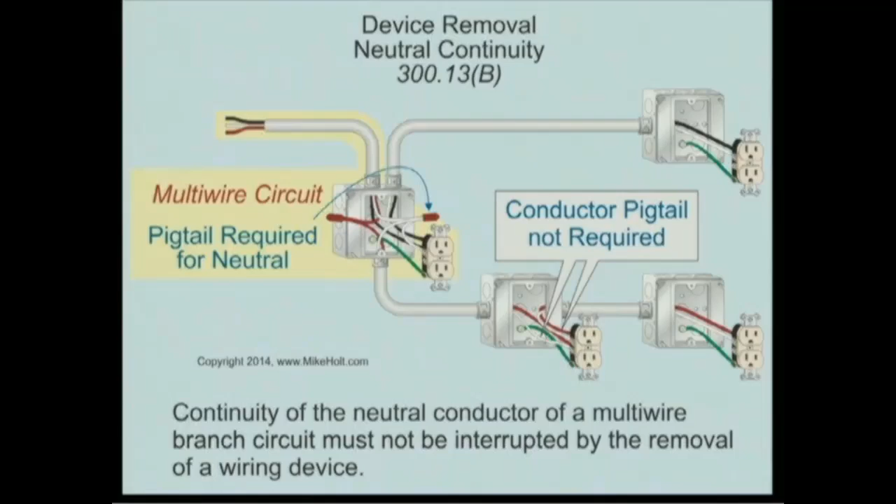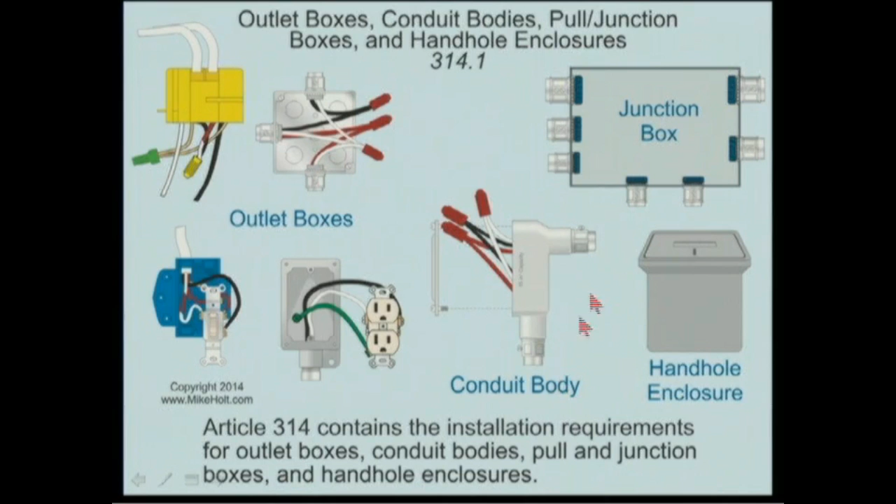314, outlet, pull boxes, junction boxes, handhole enclosures. There's a lot of work in 314. Wow. Now, 314 deals with outlet boxes, a light fixture, just making a splice box here, and switches, receptacles, conduit bodies, junction boxes, and handhole enclosures. So it's a pretty broad article.

Non-metallic boxes. You only use a non-metallic box with non-metallic raceways and cables. But there's an exception. If you want to use a non-metallic box with a metal raceway, then metal raceways can terminate to a non-metallic box where internal bonding means are provided between all entries. So if I want to put bonding bushings and bonding jumpers, then you can. So non-metallic box, okay, but if you use metal raceways, you're going to have to be bonding all those together.

314.16, number of conductors in boxes and conduit bodies. There's a lot of work here, but we're going to do this. Boxes containing 6-gauge and smaller conductors must be sized to provide sufficient space for all conductors and devices in the boxes. So you need to make sure with smaller circuit conductors that you have enough room in the box.

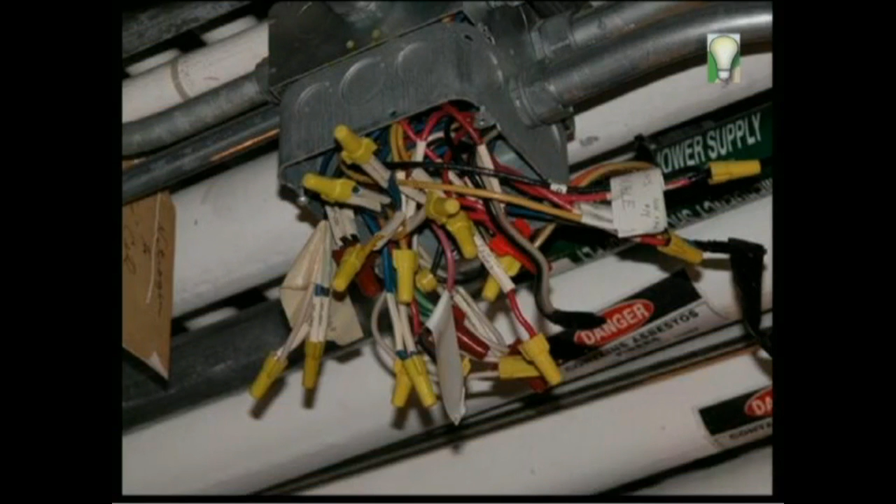That's kind of questionable. Just one more extension cord. By the way, there is no limit to the number of extension boxes that you can put on a circuit. So you put as many as you want to in there.

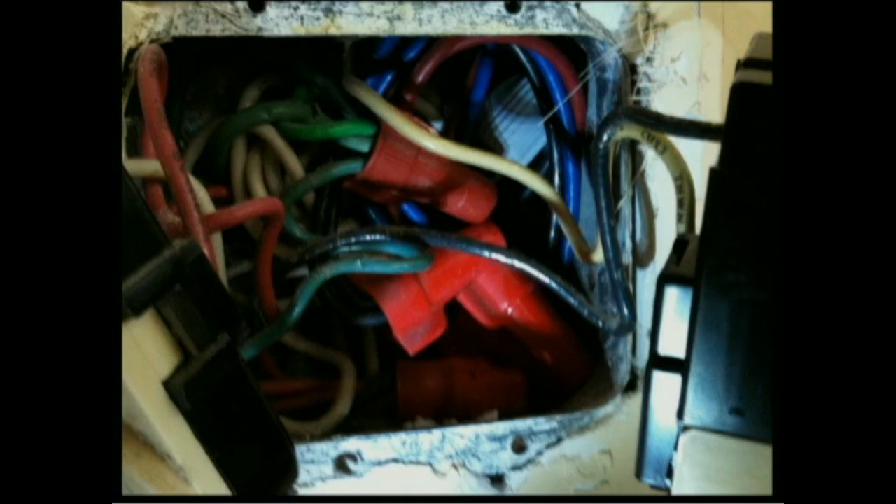Here's an example. There's a switch, there's a dimmer here, and a GFCI receptacle. That is just, wow, that's a problem. You can actually see, I don't know if you can see it there or not. You see where it's pressed in here? You can see where the wires have been pressed in there, trying to push that down to get it inside here.

Anytime you see a blue wire out of a box, take a look at this, that's never a good sign. I'm just saying. When you see a blue wire nut in a box, I got a feeling all those neutrals are twisted together. The grays are okay.

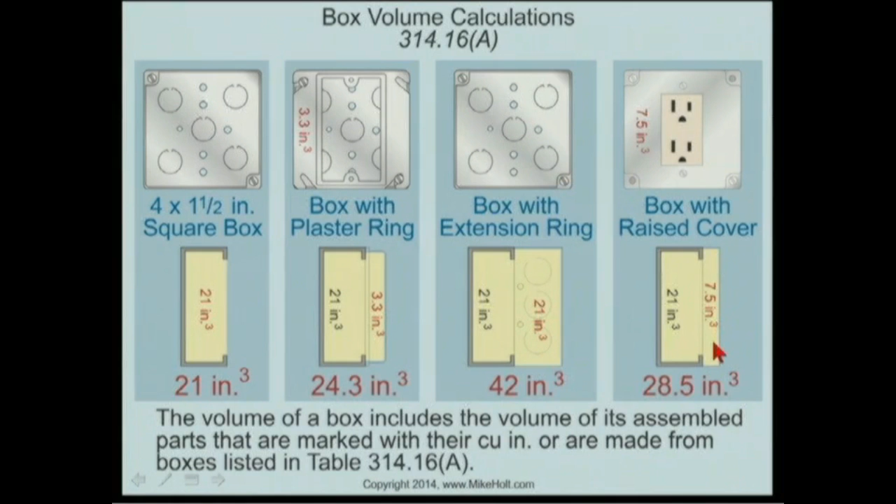Okay, so now let's do some box calculations. The first thing is, what's the volume of the box? So you get the volume of the box, and then you add the volume of any extensions you're adding. Here's a plaster ring, or here's an extension ring, or here is a box that has a cover on it that has some volume. So it's a matter of what's the internal volume. That's the first thing you go to. So you get the box volume.

And Ryan, what's the volume of a 4-square box? Is there a table 314.16(B)? Yeah. Is it A? It's 21 inches. 314.16(A) says that a 4-square by 1.5 deep box is 21 cubic inches. And then you're going to add an extension box to it, which is going to be 4-square by 1.5, so that'll be another 21, so that's going to be 42, plus a 7.5, so that's 49.5. That's the volume that we're working from in this application.

Small fittings like cable connectors and raceway fittings, lock nuts and bushings are not counted. See, what we're going to do is this. For us to determine whether this is going to be safe or not, we need to know how much volume you have. And then we start adding up the stuff that you want to put in it. It's kind of like I've got so many balls that I'm trying to put into a container. Well, how big is the container? If I know what the volume is, then I can start filling it in and I can calculate, rather than putting it all in and realizing, oops, it didn't fit.

So instead of you running all the wires and then trying to make a splice and it didn't work, best thing is know in advance, what's my volume? What am I going to put in there? Then what are the volumes? Add them all up to see if it's going to work. Let's just do this in advance. So we're going to calculate it.

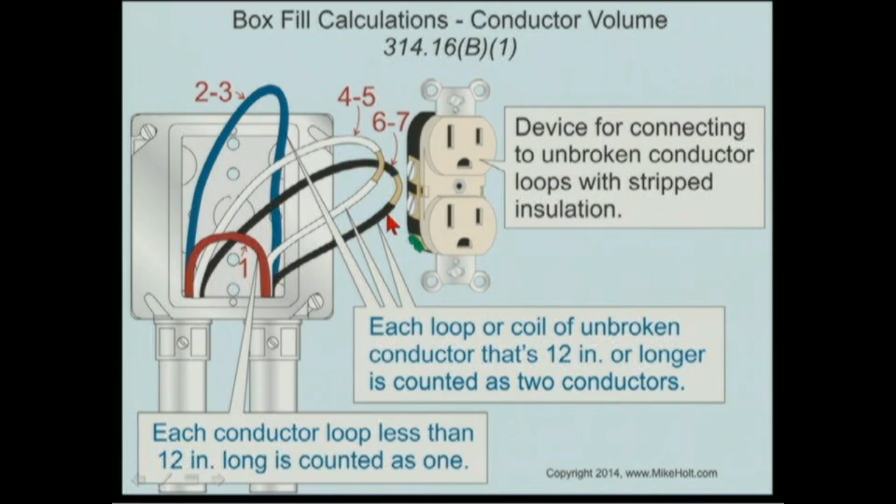If you have a dome canopy, then the fixture wires are not counted. That's part of that fan. So we don't worry about that. But it doesn't really matter. You got a dome canopy, you have so much volume up there, it really becomes not an issue at all.

If you could go back 2 slides, Mike. Let's say I decided to pigtail off of that white conductor because I'm going to a receptacle. That doesn't count either. Oh, wait, do I not have a graphic for that? No, I was looking for that. So it's in the textbook.

Right. And what it says is conductors that enter the box and terminate in the box count as a single conductor. Conductors that run through the box that do not provide 12 inches count as a single conductor. Conductors that originate in the box and terminate in the box do not count. Right. So therefore, what I should do is maybe have Mike put a pigtail on here, right? And then that pigtail does not count as a conductor because it originates in the box and it terminates in the box. Thank you for that.

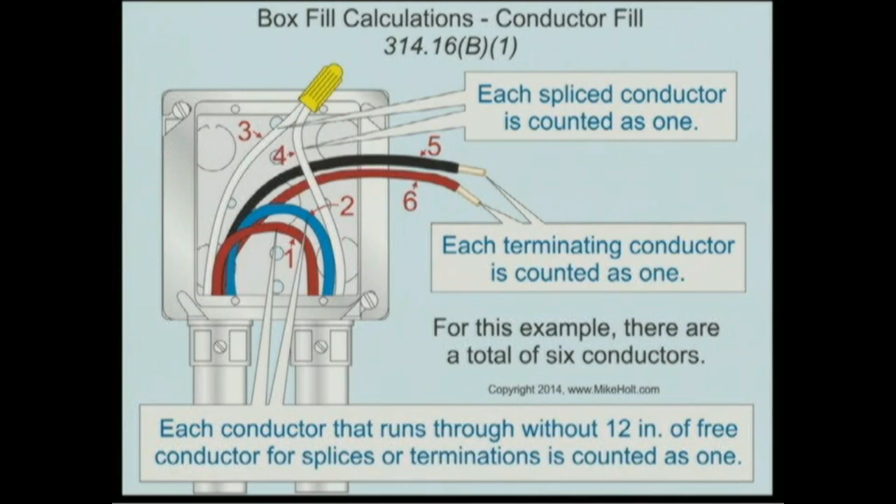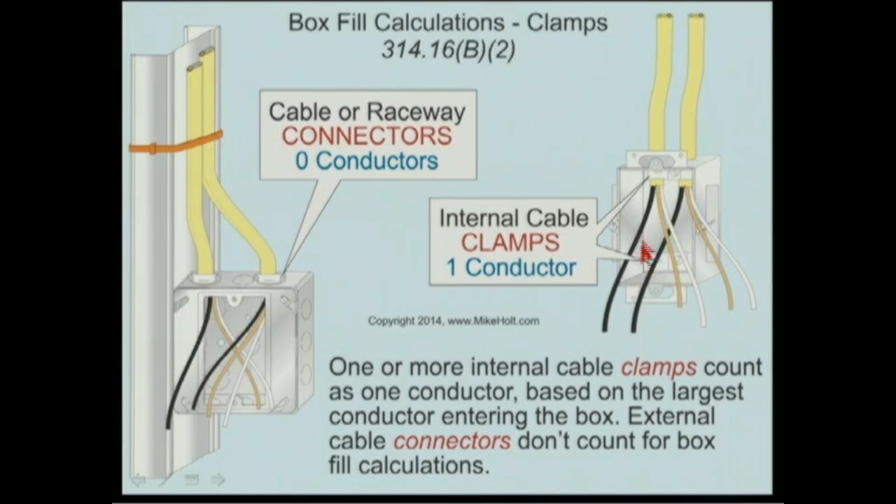Let's go now to counting volumes as it has to do with clamps. If you have connectors holding cables, it doesn't count for anything as far as the volume. Yeah, I know what's inside the box, but don't worry about it. Same thing at a raceway. Don't worry about that. But if a box has internal clamps, then the internal clamps are considered to be equivalent to a conductor. So what we're trying to do now is we're adding up conductors, and we're making things to be considered an equivalent to a conductor.

So you count the conductors entering the box and terminating as 1. Conductors running through the box that don't have 12 inches, they count as 1. If it has a 12-inch loop in there, it counts as 2 each. The clamps count as 1 conductor volume. And then we'll figure out later on what we're going to do with that.

Fixture studs. I don't think we see that very often anymore. That's an old type of system where you'd have like a 1/2-inch knockout and you have this device, and then you have this horseshoe thing, okay? That's called a hickey. That's old stuff that's done in the 40s and the 50s and sometimes the 60s and 70s. But if you have a stud or a hickey, the stud counts as a conductor, the hickey counts as a conductor. So this really is not relevant to us working in the field because you don't have studs and hickeys.

But if you're taking an exam and they said, hey, listen, we have a box. It has a fixture stud. It has a hickey. And you're like, what the heck's a hickey? At one time in the 70s, a hickey was a function of conduit bending. It's a rigid conduit bender, and it was called a hickey. So people got confused with that term there. But back in the 40s, they knew what the fixture hickey was. So go back over here. It's a horseshoe thing that goes from a 1/2-inch threaded entry down to a 3/8-inch stud. That's your hickey. That's your stud.

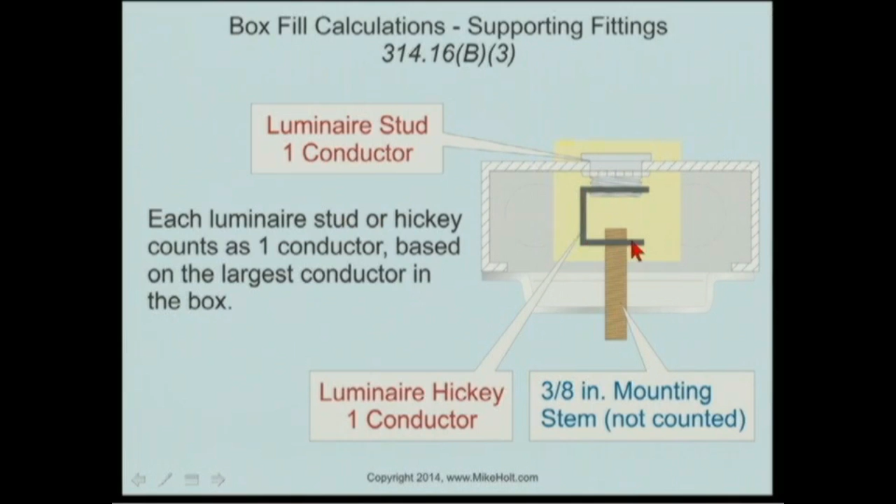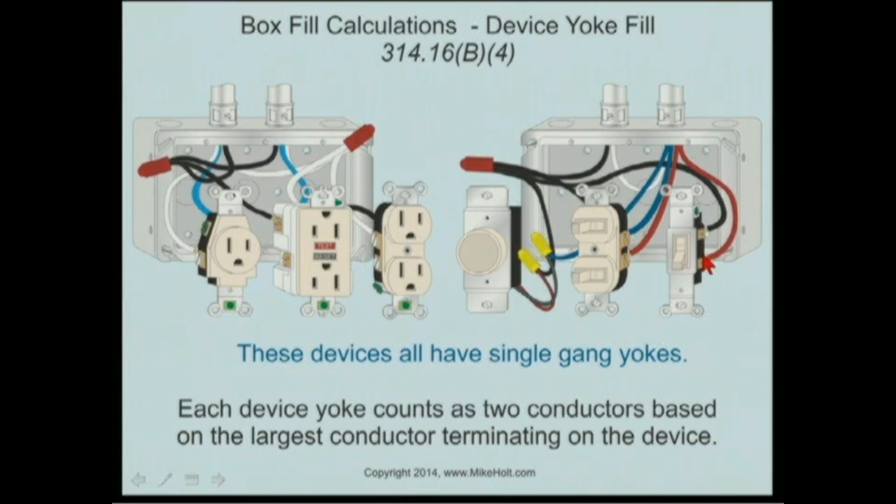This yoke is 2, this yoke is 2, this yoke is 2. This yoke is 2, 2, 2. And it doesn't matter if it's going to be a GFCI receptacle, a single receptacle, a dimmer, or a single switch. It's still 2 conductors per yoke. A yoke that doesn't fit in a 1-gang box, but you need a 2-gang box, counts as 4 conductors? Well, because it has that kind of volume in there. So that's 4 conductors.

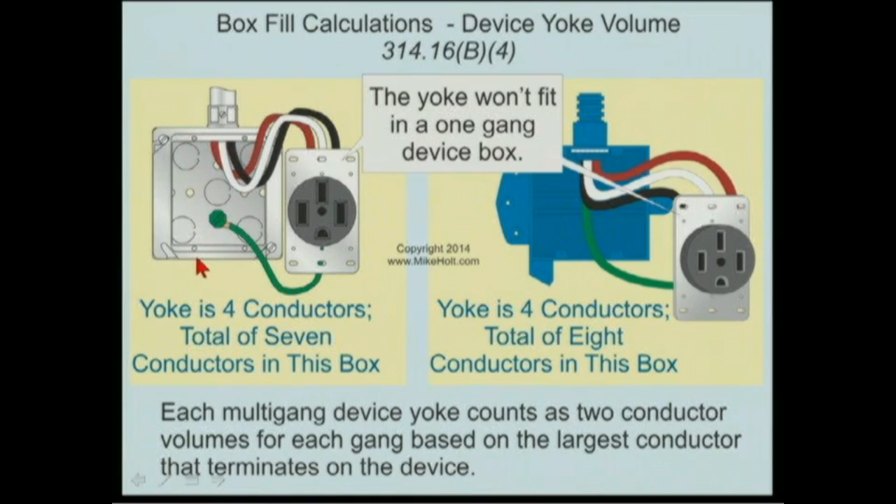Equipment grounding conductors. No matter how many equipment grounding conductors in a box, it counts as 1. Why is that? I don't know. It just counts as 1. But if you add an isolated equipment grounding conductor to the circuit as well, the isolated equipment grounding conductor also counts as 1. So I'm going to count this here. I have 1, 2, 3, 4, 5. I count 7 conductors with this example here on the left. Great. 1, 2, 3, 4, 5, 6, 7 conductors is what I count in that box.

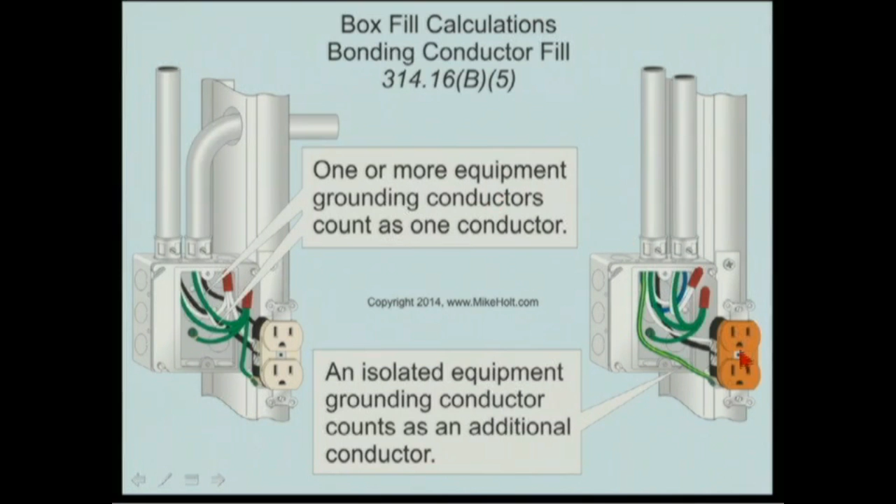Yep. Over here I got 1, 2, 3, 4, 5, 6, 7. I count 9. Here we go. Ready for this? The isolated ground is 1. The neutral in the receptacle is 2. The equipment grounding conductor is 3. The neutral that's feeding through is 4. The hot wire going to the receptacle is 5. The blue wire running through is 6. This neutral right here is 7. And 8, 9 is the device. I think so. So that's how you would do the counting in there.

Here's an example. Let's count this one. I have 1, 2, 3, 4, 5, 6, 7, 8. Is that what we have here? Oh, I'm sorry. This is 12 gauge wires. This is existing 12 gauge wire. There's 10 of these. 8, 9, 10. Existing conductor and device volume is 10 12 gauge wires. Right. How many 14 gauge wires can you add to this box?

Well, if I have 10 12 gauge wires, you see, we didn't talk about this, but Table 314.16(B) gives us the volume for conductors. And I probably should add a little graphic on here, which would be the volume of 12 gauge wire is 2.25. I don't even show it here. 2.25. Yeah, I don't show it on here. It's 2.25. 14 gauge wire is 2.

Make sure you take a moment, stop the tape, go in your code book there, and take a look at 314.16(B), which gives you the volume of conductors. Because once we count all these conductors up, we've got to now get the volume and see how that works out with the volume that we had started with as it relates to the box itself. So take a look at that inside the book in the calculation.

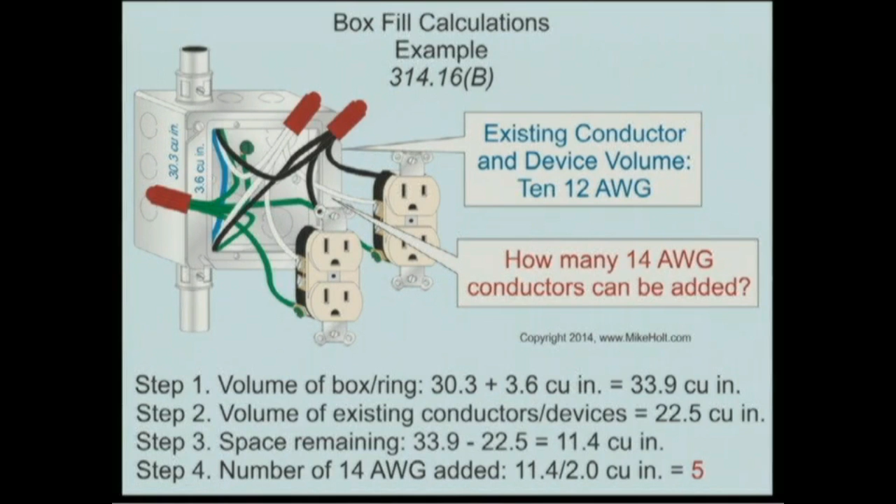Ryan? You know, and I would challenge you if you're an inspector or a contractor to really learn box fill. It's remarkably simple. Once you've done enough of them, it is so easy. It's insane. But one of the things that I thought was kind of cool over the course of my career with Draper City, when I first started there back in 2002, I wrote up box fill every single house, at least one, if not 10. I wrote up box fill constantly. And in 2013, I maybe wrote it up once. And it felt kind of good.

But it wasn't just me. It was the electricians. They stepped their game up. They started thinking about it, and they realized this wasn't hard. You don't just say, "Oh, I need a deep box." Well, what does that mean? Because they asked me when I'd write it up, well, do I need a deep box? Well, deeper than this. I don't know what a deep box is, but what you need is 26 inches. So do the math, and don't look at the back of the box where it says how many wires. Just do the math. Oh, do they have boxes? Well, yeah.

What it says though is that the industry is dumbing it down, and people aren't being responsible. Number 12, okay, well then people stop counting the device and they stop counting properly. You know what I mean? So just do it. Count the hots, count the neutrals. All your equipment grounds is 1, device is 2. Do the math. It's so easy, and it's worth doing.

And if any manufacturers are listening, please put the cubic inches on the outside of the packaging. Because when I go into the big box store and get a weatherproof box, the cubic inches are on the inside in the wrapping, and I have to unwrap it. No way, are you kidding me? It's crazy. So if any manufacturers are listening, my goodness, please put the cubic inches on the outside of the box.

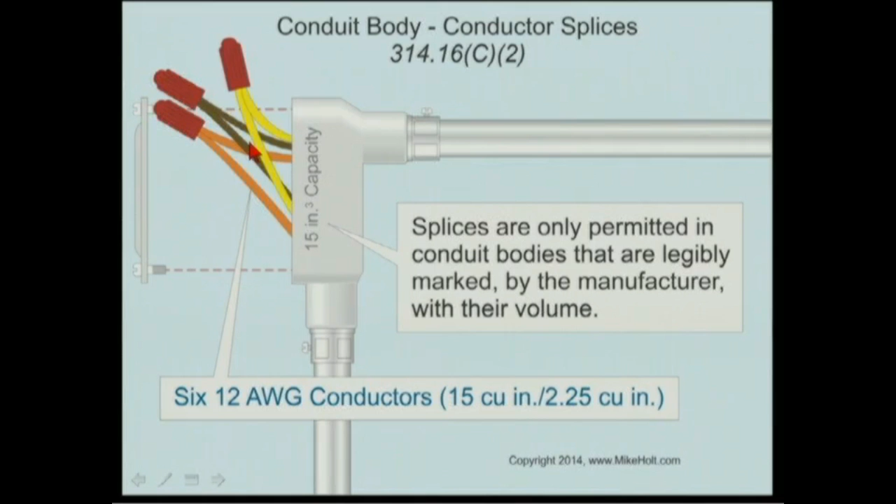So a 12-gauge wire has a 2.25 cubic inch volume. If this is marked 15 cubic inches, well, 15 divided by 2.25 gives you at least 6 conductors of 12 gauge. 1, 2, 3, 1, 2, 3, 4, 5, 6. That would be fine to put the splice in there.

So make sure you practice those exercises that we have in the textbook there. We just kind of do some glossing over here.

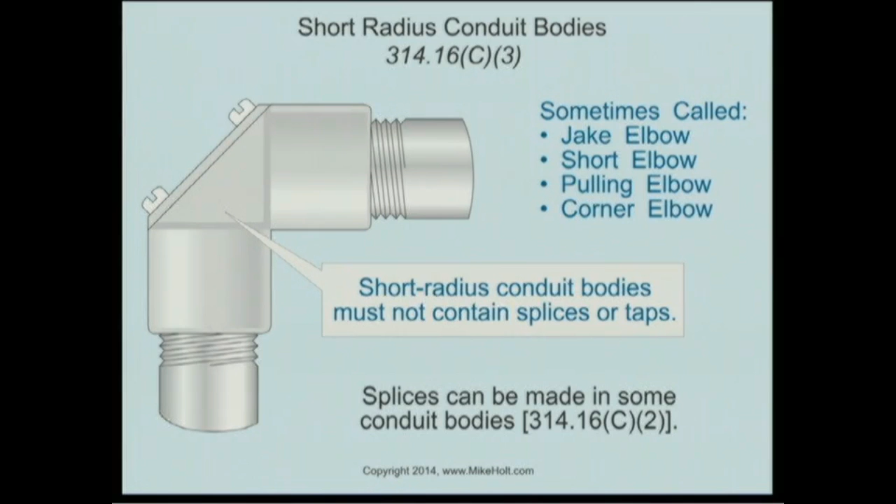Short L's or Jake L's or street L's. There's no cubic inch marked on that, and no, you can't make a splice inside those areas.

314.17, conductors that enter boxes or conduit bodies. Unused openings and cable openings in boxes. We talked about that in cabinets in 312. Now this has to do with boxes. You've got to close them all up. Plug them in there, thread it in there.

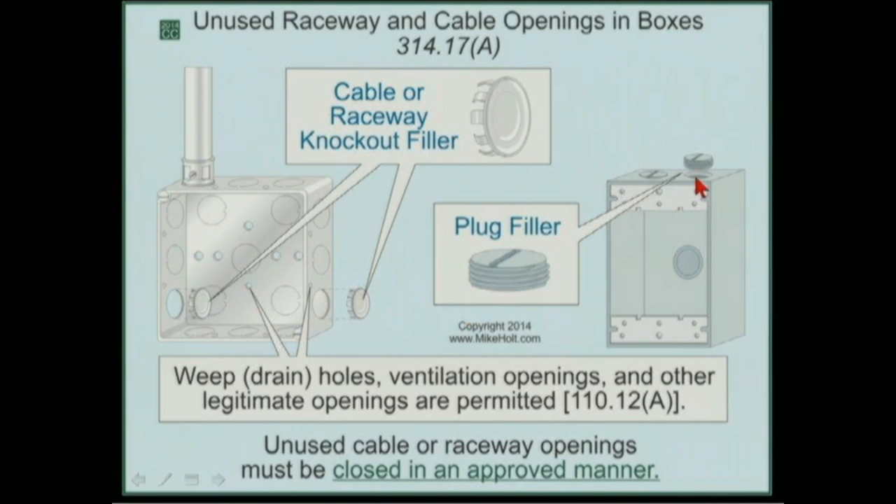This actually is a house. See, mud daubers. I'm waiting for the mud daubers to fill that in there for me. And they're working on it, well, I'm going to get to it. But that's just temporary. I'm going to get to that baby.

Non-metallic boxes. Raceways and cables must be securely fastened to non-metallic boxes or conduit bodies by fittings designed for the wiring method. We talked about cabinets - you got to secure raceways and cables to cabinets, but you had to have a rule in boxes that require you to secure it to the box, which is kind of like a no-brainer.

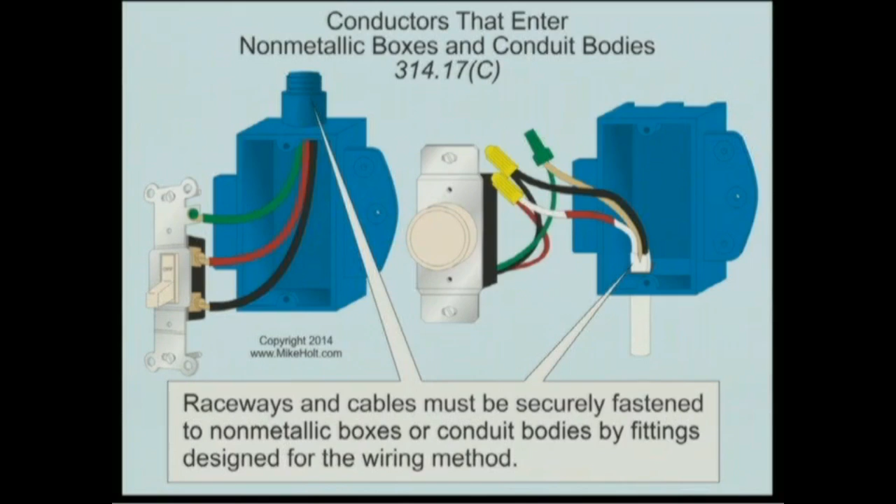And now, if you go into a one-gang box, you can bring the cable, and let's read it. Non-metallic cable terminating to a single-gang box isn't required to be secured to the box if the cable is securely fastened within 8 inches of the box.

You guys probably don't even know what this rule is about. What this rule is: today if you buy a plastic box, does it have like a little finger on there? You put it in there and it kind of secures it. Some of them do, usually they have some kind. Oh, do you have some that don't? Oh yeah, it's just a hole. Oh, when that's the case, then it's just a hole.

You just drop it in there. You don't need a connector, you just drop it in a hole. But if you're not securing the cable to the box, well, then this rule applies. With the exception, then you have to secure - you have to bring it within a 1/4 inch to the box, and then you have to secure the cable within 8 inches. Yeah, this is reality.

I did not realize that's that they all - I made see, boxes today, that's all I see. Okay, really? Yeah, no little finger thing that you - no, slide in and locks? I know what you're talking about, that kind of springs back. I think Slater or something like that? This is what I see. Wow, okay.

Recess boxes in walls or ceilings. Well, if it's similar to cabinets, if it's non-combustible, you can recess it a 1/4 inch.

Boxes, plaster rings, extension rings, or listed extenders must have the front edge set back no more than a 1/4 inch from the non-combustible finish. So if you end up having that box, they change the thickness of the wall, right? Now your box is an inch further behind the finished surface. Just put an extension ring, and then or change the plaster ring, whatever the case may be.

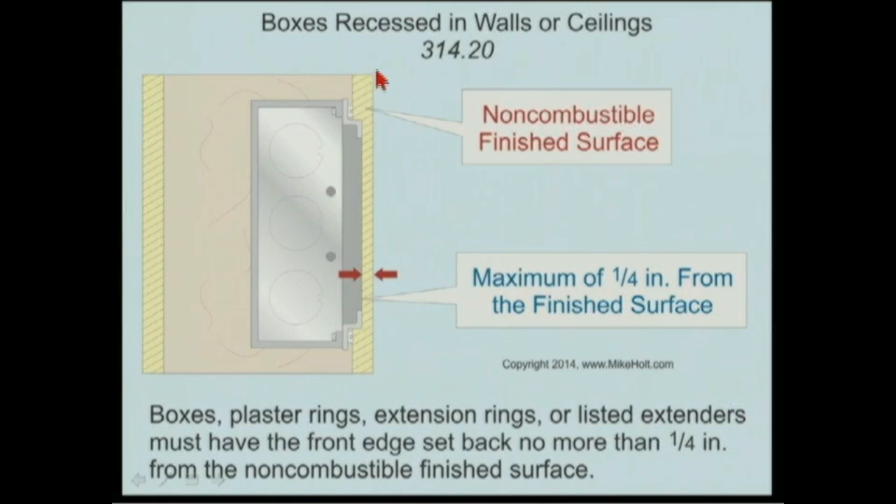So right there, gypsum—what we call drywall—is gypsum board, gypsum. No, gypsum is non-combustible. And don't give me that nonsense about it having a paper face on it. Gypsum is non-combustible. I've heard that numerous times, and I've actually had inspectors attempt to turn us down for that, saying the drywall has paper on it and that's considered combustible. I had an inspector go so far as to pull his lighter out, tear a piece of paper off, and light it on fire.

You don't think the rest of it burns? I'm serious. See you next week.

All righty then. I didn't have any clue what you were asking that dumb question. I was actually going to ask the exact same dumb question, and I put my hand down, and I saw his go up, and I was thinking, I wonder. Wow, it's amazing—but I mean, I can see somebody, it's reasonable to think the paper is combustible, you know what I mean? But you're saying the code says gypsum? It's gypsum. Yes, I'm sorry, Victor.

Where you're going now, and where you just came from, you said change the plaster ring. How do you do that without messing up where we're going to? Well, what the code is saying here is that if you're having wood, and you know this in advance, one of the options is to change your plaster ring. If it's already done, then you use an extension ring or a goof ring, whatever you want to call it. You're talking about one of those that fits inside—yeah, you have those that fit inside. Now that's not a plaster ring. Correct, that's an extension ring. No, it's not an extension ring—it's a listed extender. That's what it amounts to, a listed extender.

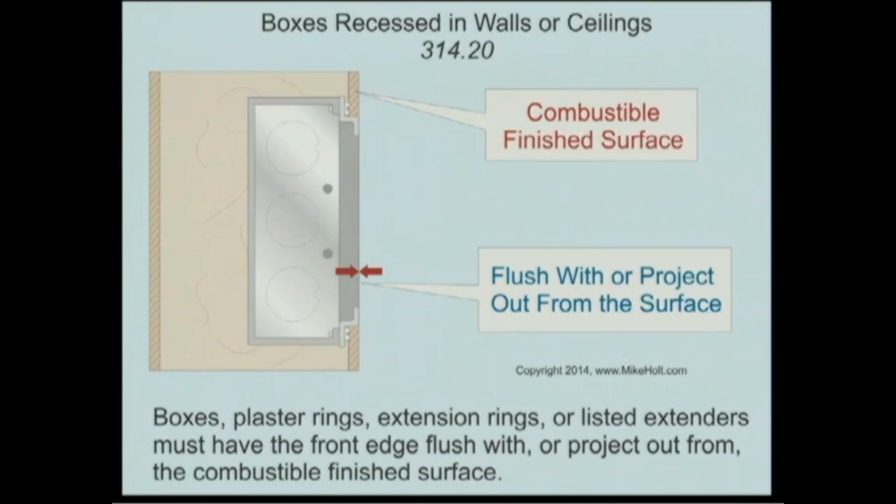Arlington, man—fantastic product. Is that right? Oh yeah, great. I remember I would get the metal extenders, how they were cut on the side—those things scared me to death. I was terrified. I'm thinking, something is just not right about this. But I mean, I put them in, right Mike? You remember that? This is going to blow up.

You have to tape the receptacle first though. Yeah, you have to tape the receptacle. You're terrified, anytime—I hope this thing doesn't blow up on me, you know what I mean? And then I've seen they come out with a plastic, simple little tiny plastic sleeve, you set it inside there. Wow, how long does it take—100-something years before somebody could think of something like this? That's nuts.

31421, repairing plaster around boxes. Repairing gaps around boxes—if you have a gap around a box greater than an eighth inch, you've got to patch it up. I'm thinking, okay, call the painter. An eighth inch—greater than an eighth inch.

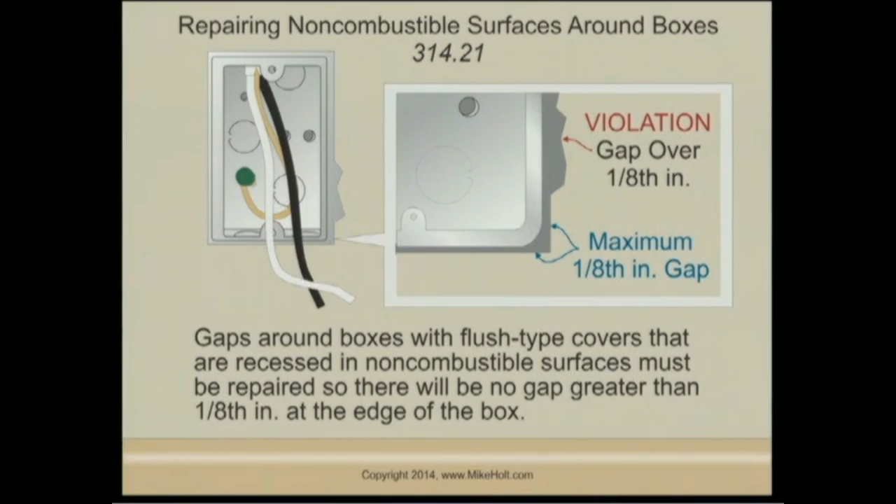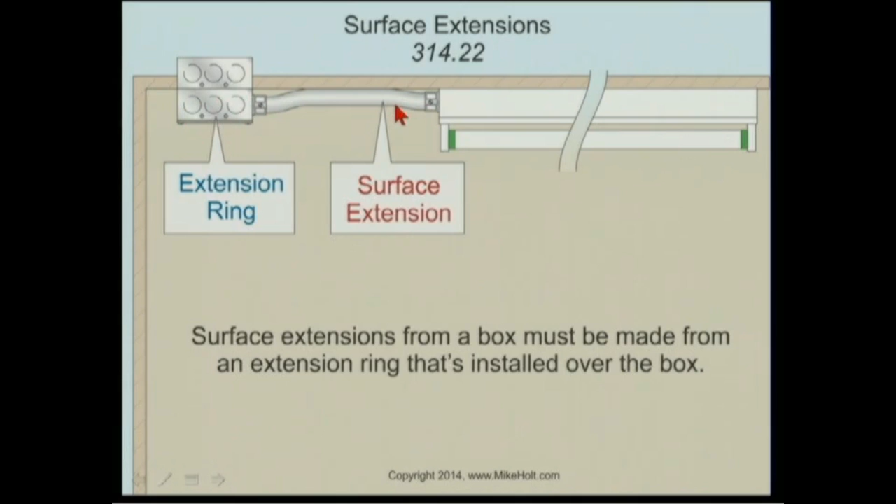Surface extensions—wouldn't think you need a rule on here, but I guess you do. If you want to make a surface extension, so you have a box that's recessed and you want to make an extension, put an extension ring on it, then come off the extension ring with the wiring method. We're like, okay, why are you telling me that? Well, I just want you to know. But there's another way of doing it: if you have a recessed box, just put a cover, and have your flexible wiring method connected to the cover. You just have to make sure that flexible wiring method is required to have an equipment grounding conductor, because obviously you're going to take the cover off and you'd lose that equipment grounding path.

Box supports. I always find it fascinating, supporting of boxes. This is one of those things that, man, it's amazing how creative people can be. It really, truly is amazing. And a simple thing of supporting a box, the code has to get into as much language as it possibly can, and it's still not good enough. So let's take a look at 314.23, support of boxes and conduit bodies.

Boxes can be fastened to any surface that provides adequate support. So there's your general statement. If it's considered adequately supported, then you're fine. And it's going to get into some specifics. It's questionable whether supporting a box to a tree is considered adequate support.

Now, I'm not purposely trying to show you all the code violations on my house. You know what I mean? I'm just saying it happens to work out that way. But many, many years ago, I put a box on a tree, and I made sure I had flex, because I figured the tree's going to flex. I did not know that when you put a box on a tree, the box doesn't stay there. The box goes up. I thought the tree went out. I don't know. I don't work with trees.

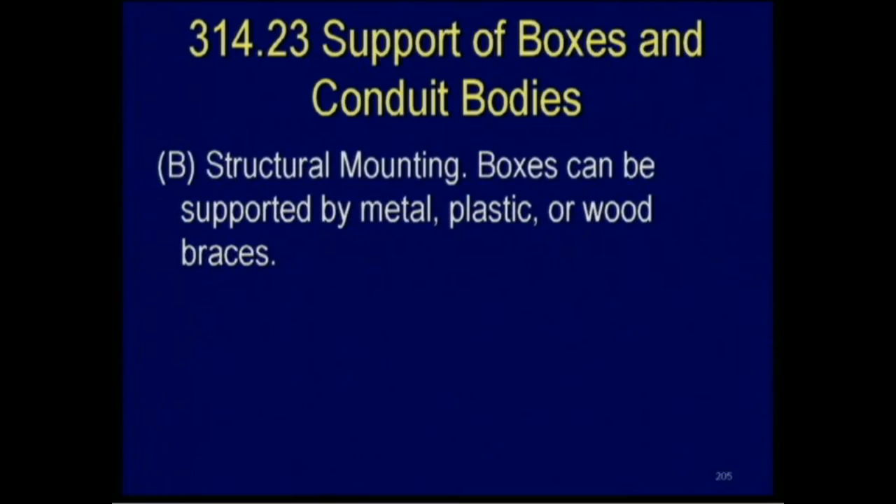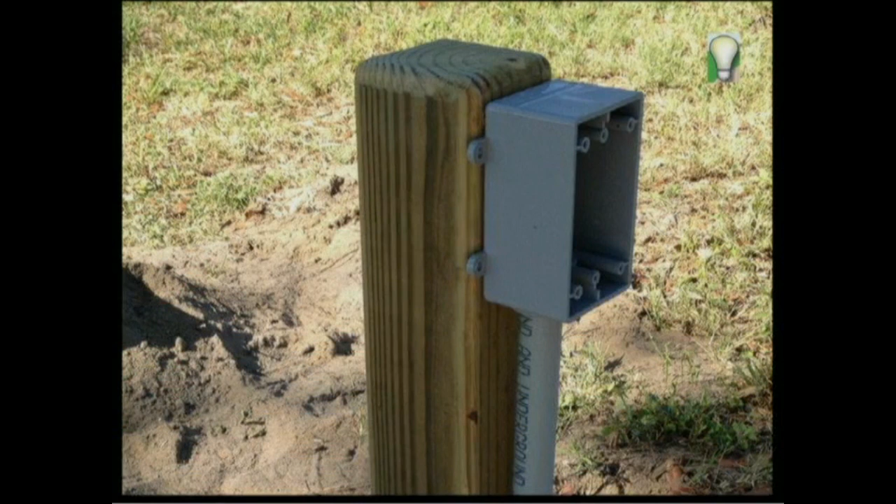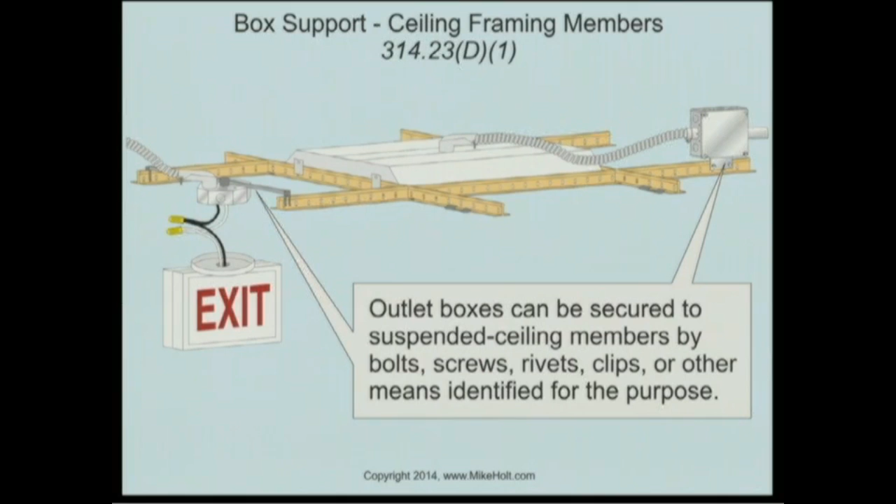So we got guys that are streaming this live on the internet, and there are people watching. We don't have the time to screw around with 314.23(F). F, is that what it is? Okay. All right, we're moving on. Let's go to 314.23(D)(1), framing members. We talked about that previously. Boxes can be secured to the ceiling framing members. So you're okay to do that.

Independent support wires. Boxes can be supported to independent support wires. Let me see, Mike. I want to say all the boxes can be secured with independent fittings to the ceiling and the ceiling support. Hey, Ryan, double checking, I can mount a box to the actual ceiling support wire? No, check it. See if the code says to the ceiling and independent support wires. Oh, okay. To the ceiling. I can mount a box to the grid, or I can mount it to independent support wires. So therefore, that should be blue.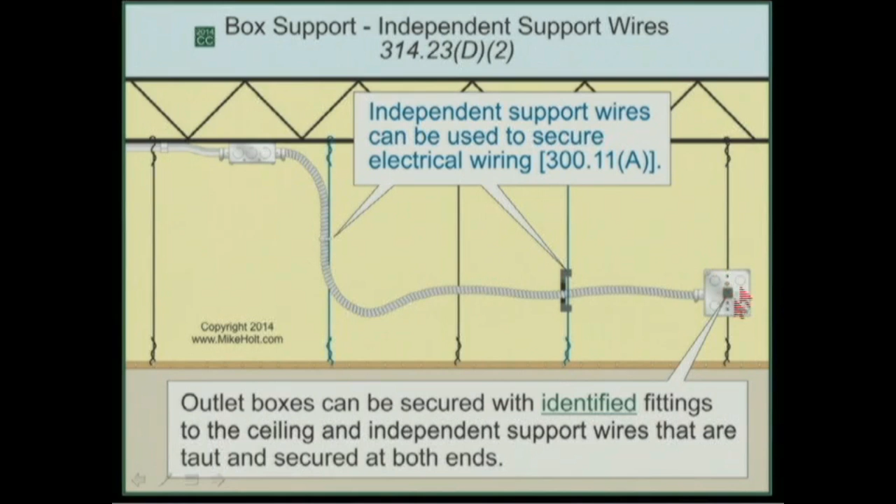We need to move this box over to a blue wire, because the blue wire is what we're using for the electrical. I don't want to call it a violation, I just want to show where it's properly installed. Oh, I think this is interesting. If you have 2 threaded entries into an enclosure and you support that within 36 inches on 2 different sides, then that box is considered supported by those fittings.

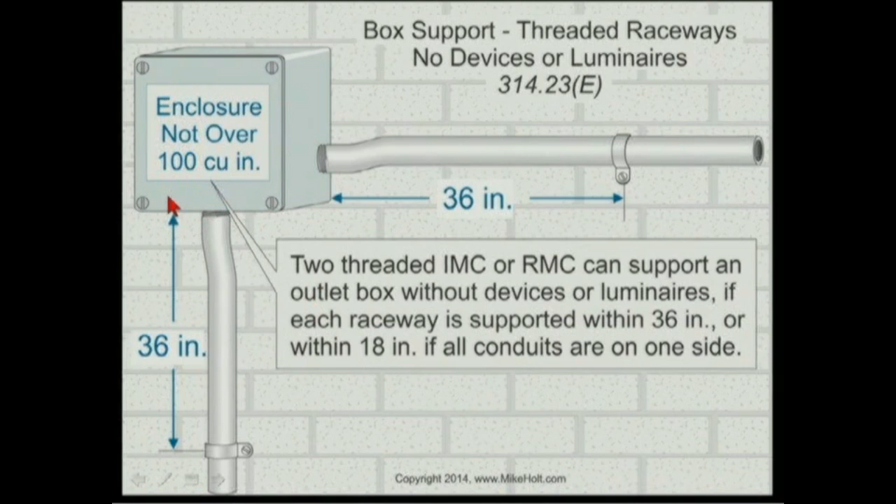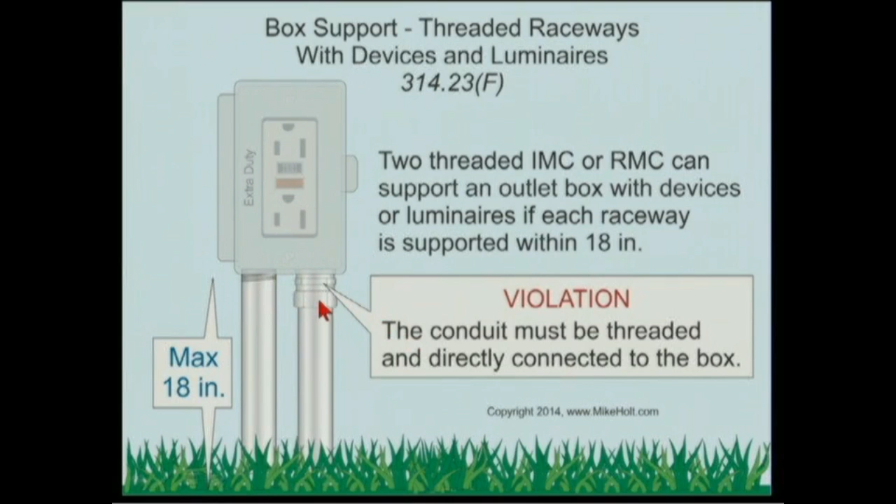By the way, with this rule you cannot have any devices, luminaires, or equipment on it. This is just an enclosure. But more than likely, you're going to have something in it. So if you have a box with 2 threaded entries on the same side with a maximum 18 inches of support, then you could put a receptacle or a luminaire, and that would be okay. The reason this is a violation is because the rule is 2 threaded entries. I'd like to make this graphic with threaded entries and make it okay, because I got enough graphics showing violations.

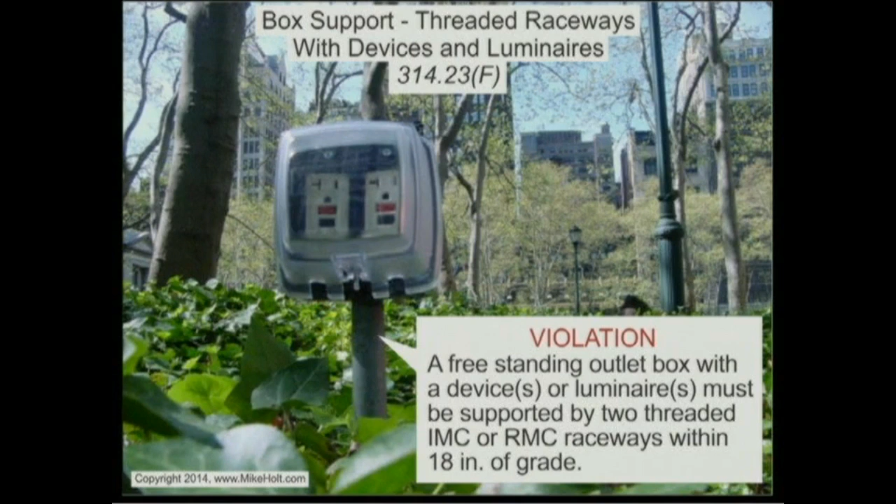I always find this fascinating, that you can support a box by a flexible cord. We probably should show a 4-square box over here and show a violation, because the box has to have a hub. Basically it's going to be a weatherproof box with a threaded entry. It's going to have a hub, and then you'd have a pendant cord, and that would be fine. It doesn't necessarily have to be a weatherproof box.

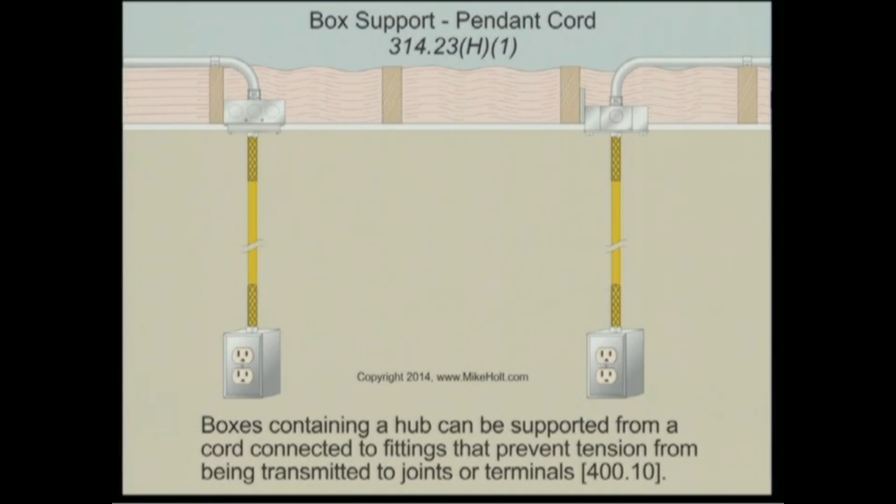They also have boxes that are specifically for hanging from cords. Daniel Woodhead makes a big variety of rubberized boxes that don't bend or crack or break. Oh, really? Oh yeah, they're fantastic. We use them for control pendants a lot. These are plastic enclosures? Actually a hard rubber enclosure, so if it gets banged by something, they have flexibility.

Oh, that really makes a lot of sense. So they make an enclosure that is rubber. Rubberized, yeah, I understand what you're saying. And it has a threaded entry, and therefore you would put the threaded entry, and then you would have the strain relief in there, and you'd have your pendant cord, and you do whatever you're going to do.

And it can be used for crane control. Specifically designed for it. We use them for crane controls. We use them for start-stop stations, for remote start-stop for equipment, that type of stuff. Wonderful. Good stuff. Ryan? You know, I always read that as mandating a hub as well, but it's funny when

you actually read it. A box shall be supported, this is H1, from a multi-conductor cord or cable in an approved manner that protects the conductors against strain, such as a strain relief connector threaded into a box with a hub. So that's one example. Doesn't necessarily need to be a hub, though. But for sure, if I thread it into a box with a hub, I'm okay. Right. If I don't, I need to get the authority having jurisdiction to approve it, then you got to debate. Yeah, okay, good.

314.25, this is an easy rule. You know, when you have a box, you got to put a cover on it. You got to put a faceplate on it. You got to put a lamp holder. You got to put a luminaire. And I learned what a lamp holder is. It's a keyless fixture. It's the most practical thing to put on an outlet box. So one way or the other, when you have a box, you got to finish it up.

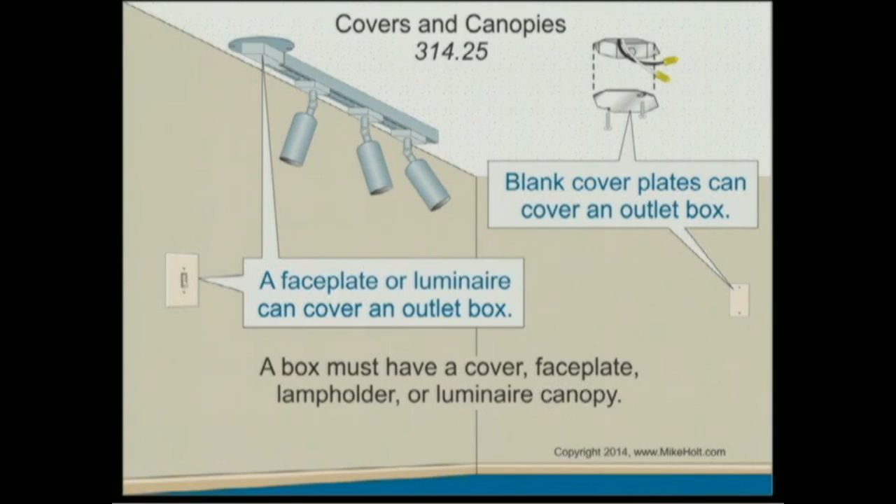And Ryan, you talked about that. It cracked you up. Big, massive house, and they run around, they put 25 keyless fixtures all over the place because somebody thinks you have to have a luminaire. No, you have to have a lighting outlet, not a luminaire. You have to have the box, however, closed up. Wait a minute. Do I have to have receptacles put in? Oh boy. I mean, if I don't have the light, do I have to put in switches? I'm just thinking. All right, we're going to keep going.

Yeah, 210.52 says the receptacles required by this section shall be installed. And you need receptacle outlets, and a receptacle outlet can only occur when you have a what in it, per Article 100? A receptacle. If you have no receptacle in an outlet, then you don't have a receptacle outlet. I have an outlet. So you need receptacle outlets, and you need lighting outlets, but do you have to have a luminaire on a lighting outlet to make it a lighting outlet?

No, you just need to have it at a location. We didn't talk about this, but when you have a lighting outlet, the box has to be identified for the purposes of hanging a luminaire fixture to the box. That's going to be your 8-32 screws. A paddle fan, that's in the book there. You'd have to have a box that's designed for a fan, which is going to be your 10-32 screws. And then it gets some more details. We're going to talk about that when we get into 410, Chapter 4. Let's move on.

All right, 314.25 continuing. New 14 code says screws used for the attachment of covers or other equipment to the box must be machine screws that match the thread gauge or size of the screw holes in the box. In other words, sheet metal screws and wood screws and everything else are not permitted. Metal faceplates, where used, must be connected to an equipment grounding conductor. The code doesn't describe how to do this, but simply putting a metal cover on a metal box automatically takes care of it, even though it doesn't specifically say

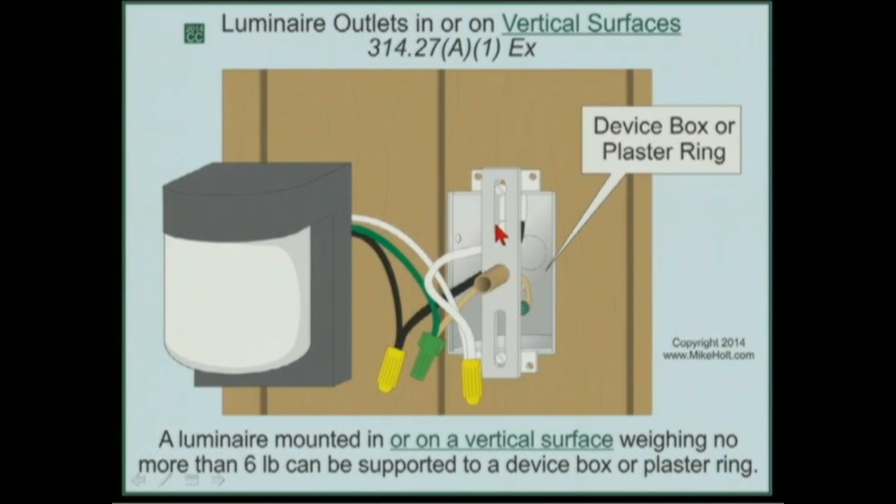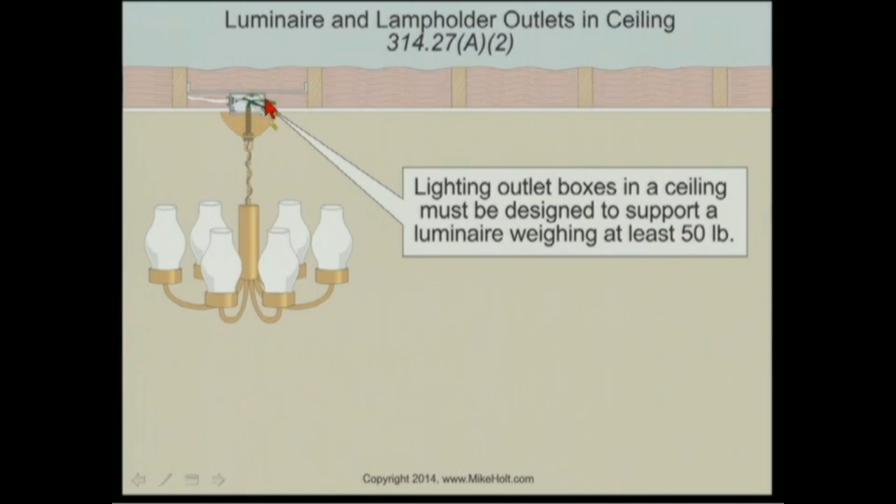Lighting outlets, I mentioned to you earlier, in a ceiling must be designed to support a luminaire weighing at least 50 pounds. So when you get a box that's designed for a luminaire, it will automatically be listed to support 50 pounds. If the luminaire is more than 50 pounds, then you're going to have to get a box that's specifically listed for the weight of the luminaire. And if you can't get a box that's listed for the weight of the luminaire, then you would have to independently support that fixture from the box.

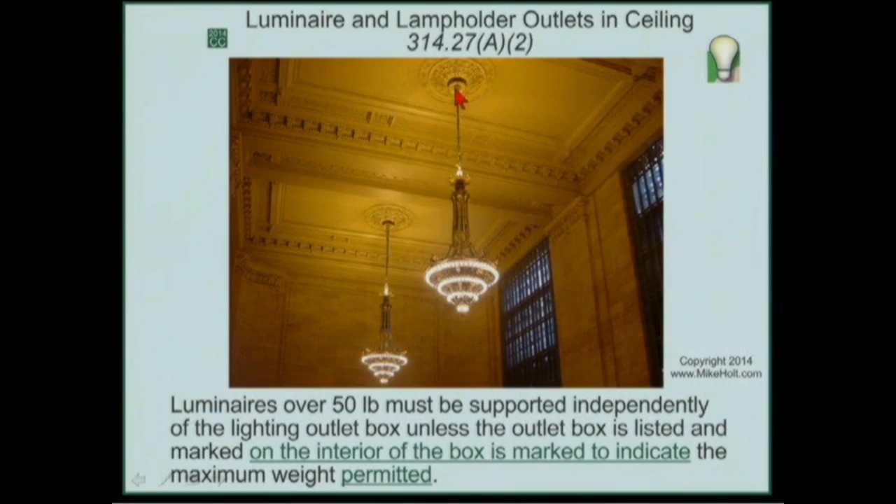Now, I was at one of the big box stores, and I was looking at some of the paddle fan boxes. There was a whole row of boxes. I noticed they had different weights of fans, and each of those fans had different weights for lighting fixtures. There was a fan box, I think, for a 70-pound fan, and it was marked on the box, listed for a 140-pound light fixture. I did not know. Simply go into Lowe's, and you'll see.

I tell you one thing, the box manufacturers, even though Eric, you had some problems with labeling in cubic inches, these guys that are selling the fan boxes are doing an amazing job giving a lot of information on the outside packaging. And I thought, wow, 140 pounds for lighting fixtures, 70 pounds for a fan. So that's information that I wasn't aware of. Maybe they make boxes that support more than 140 pounds. Brian, do you know if they make anything like that?

Oh, yeah, they definitely do. Really? We actually run into this pretty frequently at our Naples office because we have houses with real large crystal chandeliers, and crystal is very heavy. Really? Yeah. But where do you get these boxes? Believe it or not, in Naples, because they're used frequently, they're readily available. So supply house. But what manufacturer? There's a number of them.

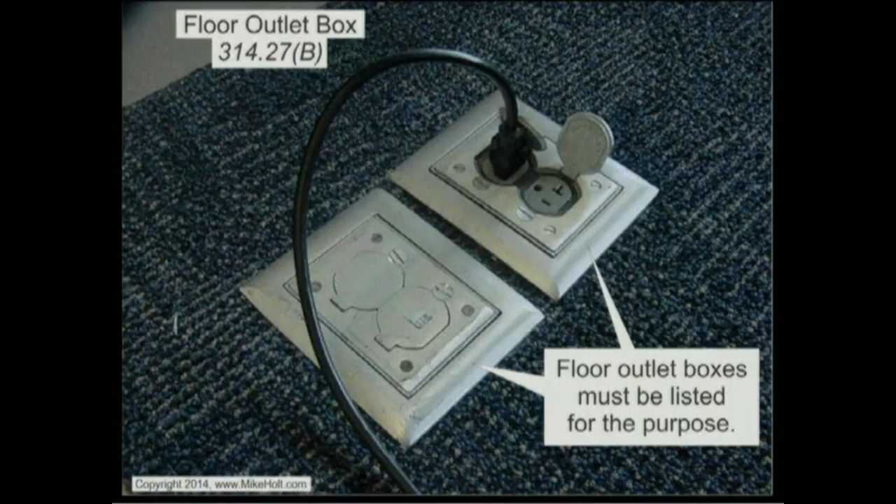I didn't realize that the code requires that when you have a floor box, it must be listed. And not only that, but they make floor boxes specifically for wood floors as well as concrete floors. So, Ryan and Brian, as we were talking about, in the electrical industry we really have to learn what products are available out there. Get EC&M magazine. If you're not going to read the articles, at least look at the pictures. You know what I mean? Just get into the information.

Let's go to 314.27(C). Fan outlet boxes must be listed, marked as suitable for the purpose, and they cannot support a fan that weighs more than 70 pounds. Paddle fans over 70 pounds must be supported independently of the box.

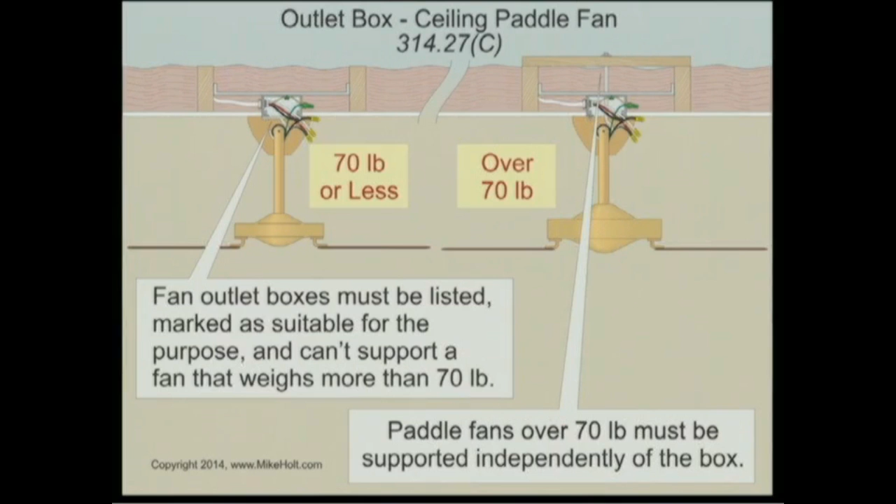Now, I'm going to have Mike add a graphic. There was some discussion before we went live on the recording of the DVD about putting a paddle fan outside in a wet location. Apparently, the company called Garvin, GARVIN Industries, makes a wet location paddle fan box. So if you're in a wet location, let's say outdoors. Now, I'm not talking about under an eave or under a canopy. Under a canopy is going to be a damp location.

Ryan, help me out here. If I'm in a damp location, what kind of boxes can I use? Do I have to use a wet location box? Is there such a thing as a damp location box? I know if I'm in a damp location, and we'll talk about this at 410, I have to use fixtures that are listed for a damp location. And I think we're going to have to go to boxes in damp and wet locations, 314.15.

314.15. What's that say? In damp or wet locations, boxes, conduit bodies, and fittings must be placed or equipped so as to prevent moisture from entering or accumulating within the box, conduit body, or fitting. Boxes, conduit bodies, and fittings installed in wet locations must be listed for use in wet locations. Okay, so I don't have to use a wet location box. Yeah, in a damp location we just have to prevent moisture from entering. Bubble gum over the holes, and you're done. All right, so if I'm under a canopy, I can use a regular paddle fan box in a damp location. It's only if the fan is actually in a wet location.

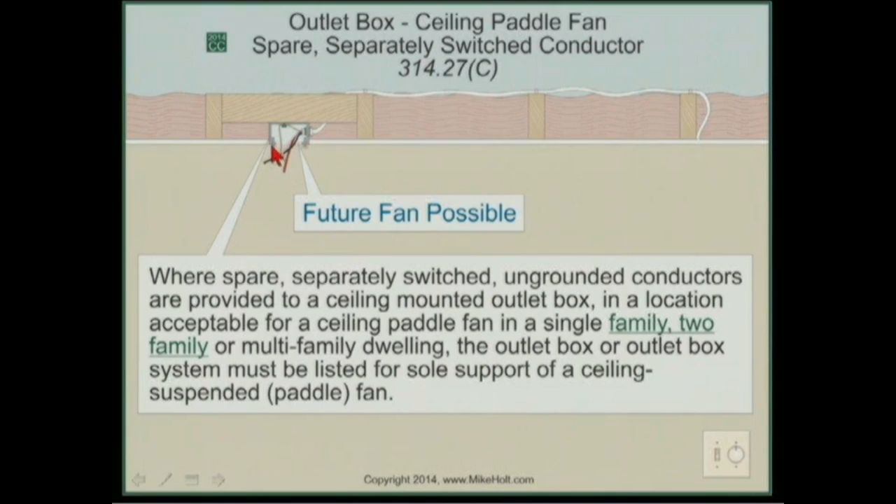Okay? Let's move on. An interesting rule: if you run a spare wire to a box at a location where you might put in a fan, then the code says the box you're going to use has to be listed for fan use. And the thinking is this. A guy runs 3 wires from a switch up to a box. He puts a light fixture. But later on, they decide they want to put a fan. Well, there's a spare wire up there for the switch leg for the fan. So they want to make sure you have a box that's fan rated.

Now, other people are saying, no problem. I run 2 wires up to the box and just put one of those remote control switches inside there, hang the fan, and control the light at the same time. So we're really not getting anywhere with that. In other words, somebody could put a regular light box in a location, but later on hang a fan and control the switching with a remote control without a spare conductor. So those of us in the trade have to recognize when you hang a fan in a box, the box must be a fan-rated box.

This is really, really important because fans do fall. As a matter of fact, I got a call recently where a fan just fell down, I think in a restaurant. So even though the code says if you ran a spare wire, make sure the box is fan-rated, maybe it's something you want to think about even where you're not running the spare wire. Not a code rule; now we're getting into design. You might want to make sure the box is fan rated. That's all I'm trying to say here.

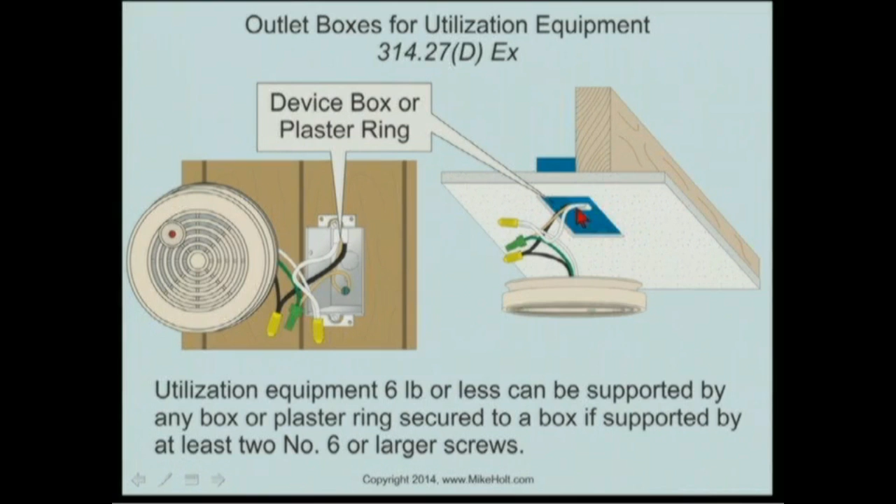Let's move to 314.27(D) exception. It says you can use a device box or a plaster ring to support equipment by the 6-32 screws. And when they say equipment, they're really talking about the smoke alarm. Is that the right word, Ryan? Smoke alarm? Talking about the smoke alarm. Because technically, over the years, this was only supposed to be in the ceiling; you'd put a smoke alarm or a receptacle. Right? Yeah, it's a device box. Right. So it makes it clear you can do that.

314.28, boxes and conduit bodies, 4 gauge and larger. This has to do with straight pulls and angle pulls if you have 4 gauge and larger conductors. You might be having LB conduit bodies, and then you might be doing U pulls. And there's a big formula involved to make sure you get it sized properly. Let's take a look at it.

A straight pull means conductors coming in from one raceway and going out the other raceway. This is one of those topics where when I teach it, it's possible you'll get it, and then you blink, wait, open your eyes, and all of a sudden you get confused. It's easy to get, but also easy to forget. So I'm going to try to keep it simple and clean.

If you have a straight pull - I've done this before. I once went to a job where they'd slabbed the panel in one wall with PVC, but when you looked in the ceiling, all the raceways were stubbed on the other side of the room. The guys that did the ground floor slab and the guys that stubbed the pipes didn't connect the two.

Looking at that situation, I had two choices: run all the branch circuits over the panel on one side, or get a wireway, make a straight pull, and take it over to the panel board. That's what I did - I did a straight pull.

It was a 2-inch raceway. When we followed the rules - let's take a look at them, we'll make a graphic - the rule is 8 times the largest raceway. In this example, it's 3-inch and 3-inch, so it'd be 8 times 3. I'd need 24 inches from this entry wall to the opposite wall.

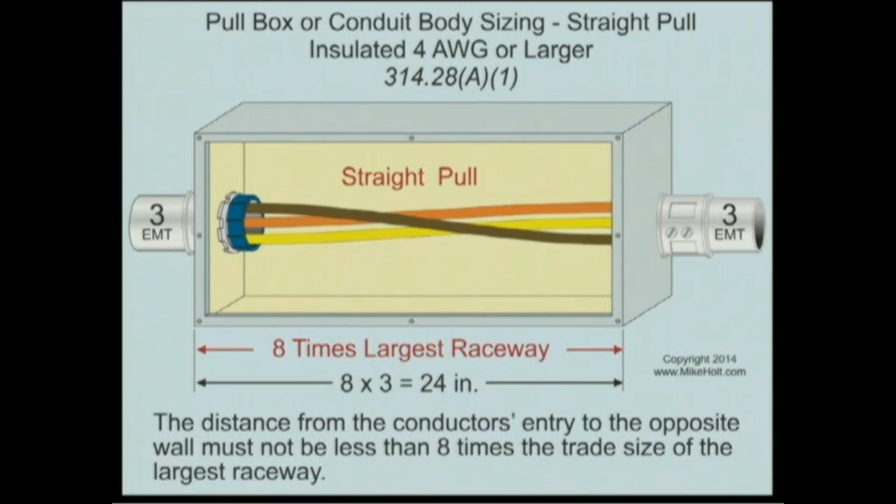I guarantee you, if you go a little bit bigger, you'll save money because it'll be easier to pull in, rather than fighting it - that's the worst pull in the world. As I mentioned earlier, you would never want to go 40% fill on a raceway.

You don't want to figure 8 times the largest raceway on a pull. Okay, you have the expert, Victor. If I had a 2-inch raceway, beside 8 times — we're talking design now, he's an expert here on design. What would you kind of like to see, 8 times, 10 times?

Well, it's going to be a feel. What are the conductors you're pulling in there? How long is the pull going to be? What's the size of the conductors? You know, it's going to vary. You want the guys in the DVD to understand, give it an option, make it bigger. You won't be sorry.

Brian? Well, I was just going to say, from a practical standpoint, you really don't want anything less than a 24-inch junction box, just because there's not enough room to move your hands while you're trying to pull the wire. You're just going to tear your knuckles up. And I'm sure there are design standards you could come up with, but just think about it, you have to pull the wire, and 2 feet is not much.

Okay, great stuff. And there's also another reason why you would never use a conduit C in this. But I've seen that happen. Oh yeah, some people put a conduit C in there. Well, hang on, not everybody knows what a conduit C is. We have LBs, and now we're having a C. It's just a straight with an opening and a cover, and that's great for 6 gauge and smaller.

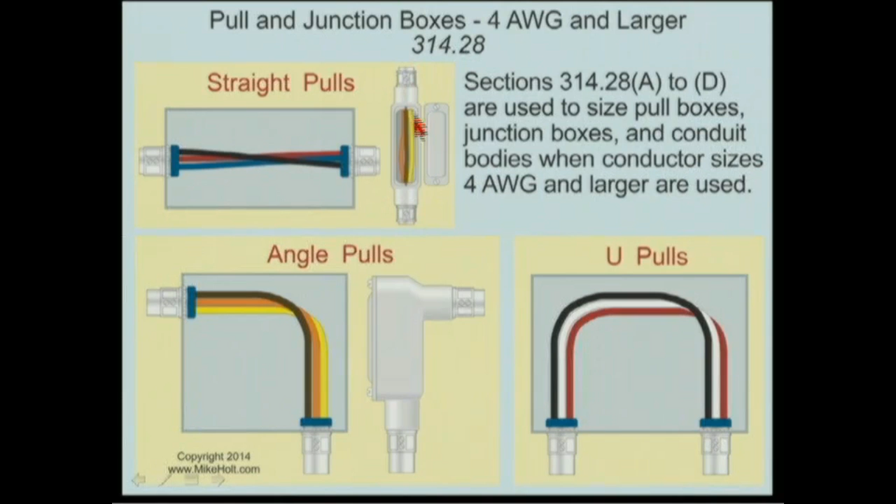But for 4 gauge and larger, you might not want to go 8 times the largest raceway, because of what we just talked about. All right, let's go on.

How about angle pulls? That's where conductors are not a straight pull. See, it's real simple — if I don't have a transfer marked with a class, it's class 1. If it's marked class 2, it's class 2. If it's a straight pull, it's a straight pull. If it's not a straight pull, then it's an angle pull. There isn't any other option here, so that makes it kind of nice.

Let's look at angle pulls. Angle pulls are measured at 6 times the trade diameter of the largest raceway, plus the sum of the others: 3 and 2 and 3 and 2. So A and A would be 6 times 3 is 18, plus 2, is 20 inches — that's from this wall to this wall, going across. Vertically, 6 times 3 plus 2 is also 20 inches. So maybe a 24 by 24 might work, but you wouldn't be sorry if you made it bigger than a 24 by 24.

U-pulls — that's where the conductors obviously are not coming in at an angle, not a straight pull. They're kind of like, there aren't many options left: they go up, over, and down. You size it the same way: 6 times the largest raceway from the entrance to the opposite wall, plus the sum of the other raceways. So 6 times 3 plus 3 is 21 inches from this entry to the other side.

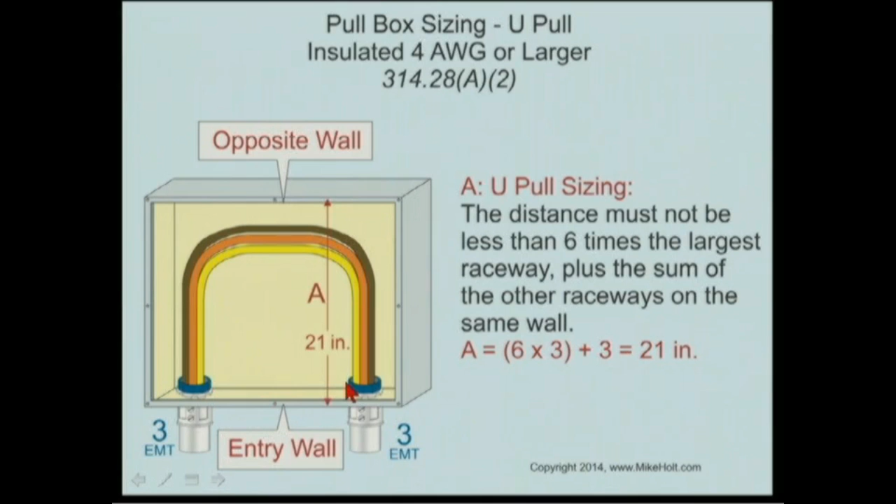Well Mike, we'll talk about separation. I'll talk about it right now — raceways containing the same conductor cannot be less than 6 times the trade diameter of the largest raceway. So from this edge to this edge, cannot be less than 18 inches. Just giving information.

Now, if you're making a splice — let me go back here. Let's take a look at this angle pull, and look at the math here.

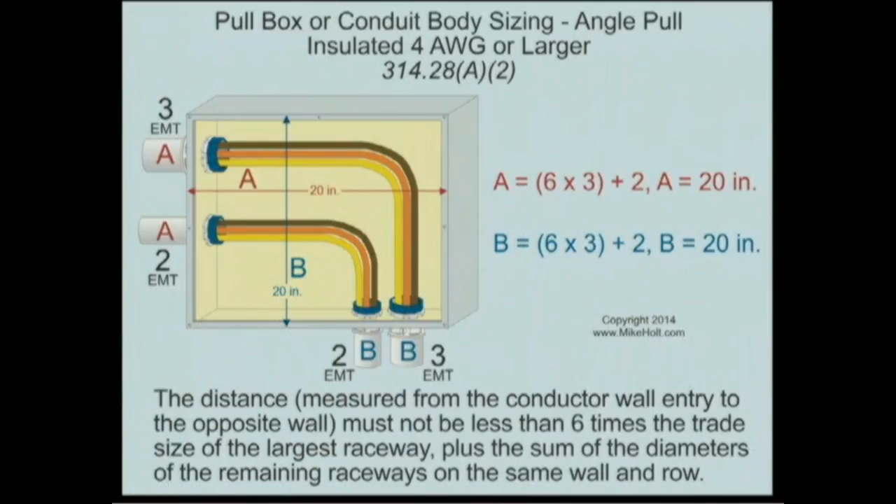Angle pull, ready? It's going down. I have a 90 coming in, and then what? A 90 going down. So it's not 90, 90, 90, 90 — it's just 90 coming in, 90 going around, and then a 90 going down, and then it kind of rolls into the box. That's why it's 6 times the largest raceway plus the sum of the other raceways, because you have another raceway, you might need to move it over a little bit to accommodate the conductors of the others.

Let's go to a U-pull. Wires are coming out, I make the 90 outside, and it goes in that direction. So I need enough for 2 90s. Angle and U-pulls are 2 90s, so it's not 8 times the largest — it's 6 times the largest, plus the sum of the others.

When you make a splice, look at the splice, I'm pulling it in. There's no 2 90s, pull it in. So when you're making a splice, we would have the same of the other. From the right side to the left side, dimension A is going to be 6 times the largest raceway plus the sum of the others. And from the bottom to the top, 6 times 3 plus 3 and 3 is 24 inches.

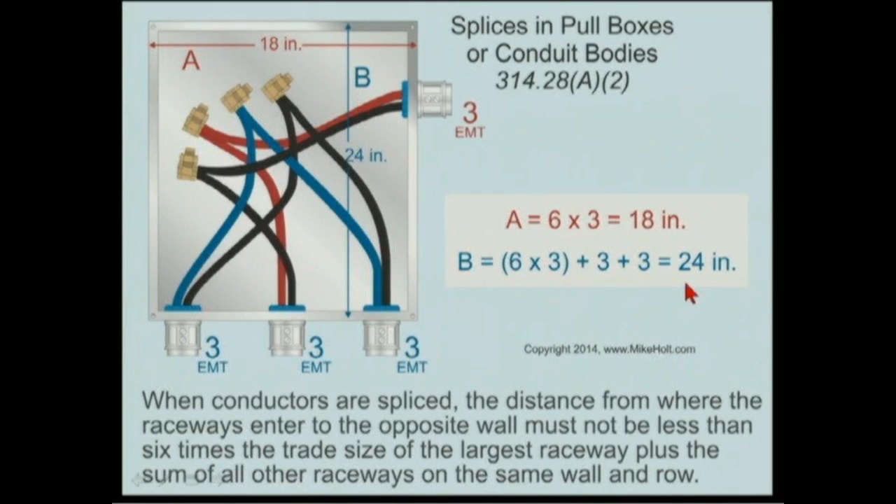Just like an angle pull. It's not a straight pull. Now you've got all the rows.

If you have this row and that row, just get the biggest row. If you've got a 3, a 1 and a half, a 1 and a half, and you've got 1, 1, 1, well then this row is bigger. 6 times 3 plus 1 and a half and 1 and a half, 6 times 3, 1 and a half, 1 and a half, 21 inches from one entrance to the opposite wall.

And of course we would have those same raceways, here they are right here. And then from this top wall to the bottom, we need to put on here 3, an inch and a half, an inch and a half. Then that would be from the top to the bottom, 6, the largest row, it looks like okay.

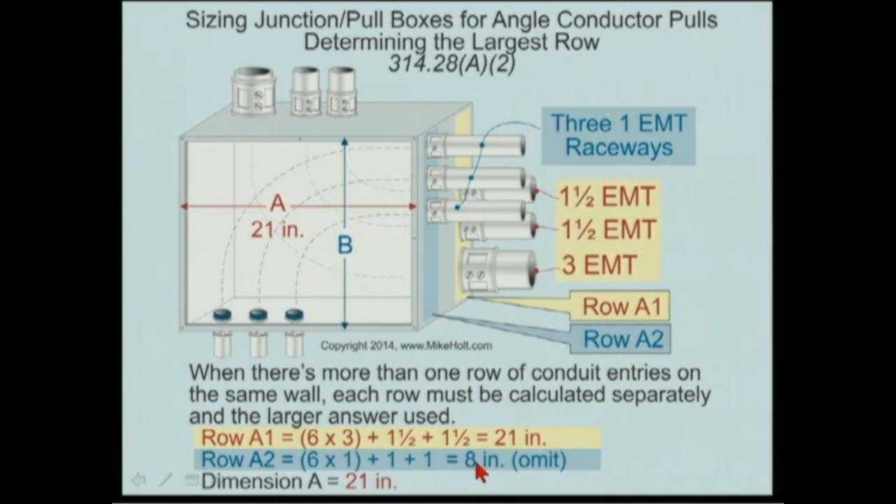Using this dimension, A would have been 21. And this other row right here would have been 6 times 1 plus 1 and 1. That row for dimension A would have been 8, of course. We go with the largest of the two. Just showing dimension A only in that example.

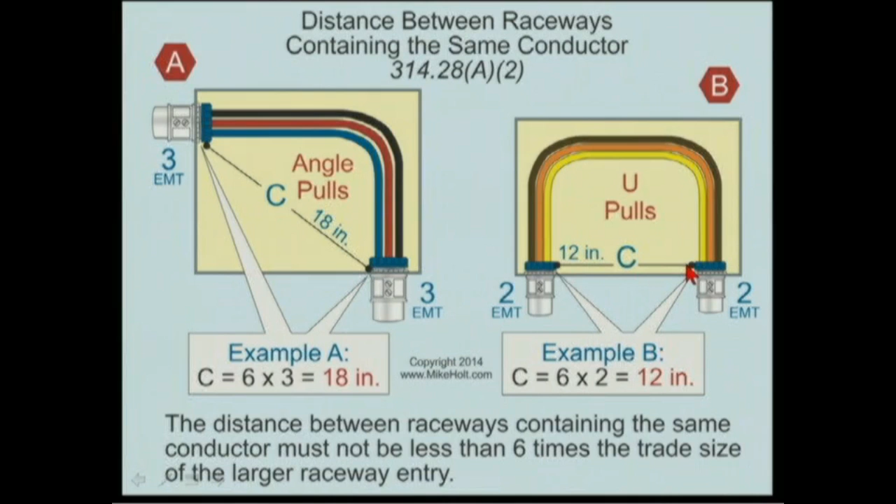Distance between raceways containing the same conductors. If this is a 3-inch and a 3-inch, the edge between the two raceways is 18 inches. It's edge to edge, because if it says the distance between raceways, obviously not the center of the raceway, but between raceways. 2-inch and 2-inch, between the two raceways, 6 times 2, it's going to be 12 inches.

When you're bringing a raceway out the back of an enclosure, these rules apply to boxes as well as conduit bodies, that when you come to the back of an enclosure or conduit body opposite a removable cover, that's a totally different ballgame. Now we're talking about bringing in a conductor, putting in a 90, and then putting it into the enclosure. When we get done with it, we just need enough bending radius required for the bending radius of the conductor. That references back to 312.6A, using the table that uses 1 conductor per terminal.

So you're going to go to table 312.6A, take a look at it, find out what size conductor - let's say it was 500 kcmil - and it's going to be 6 inches. Is that right? I thought it was 4. Yeah, I think it's 312.6A, six. One conductor per terminal, was that 6 inches? Yeah, 6 inches. Same thing with the conduit body - if you enter to the opposite wall, if you can get 6 inches conduit body, okay. But more than likely, conduit bodies are probably not going to meet the requirement you need as it relates to pulling large conductors in there.

Now the rules we just talked about, an angle pull is what? From entrance to the opposite wall, no less than 6 times the largest raceway. 3-inch conduit body, I need to have what? 18 inches. But the 3-inch conduit coming in on the side, opposite removable cover, what's the largest conductor that can be entered in that? And what's the wire that you have to bend? That might be 6 inches. So they do make conduit bodies that are very, very long to accommodate this, but most people just buy a regular conduit body.

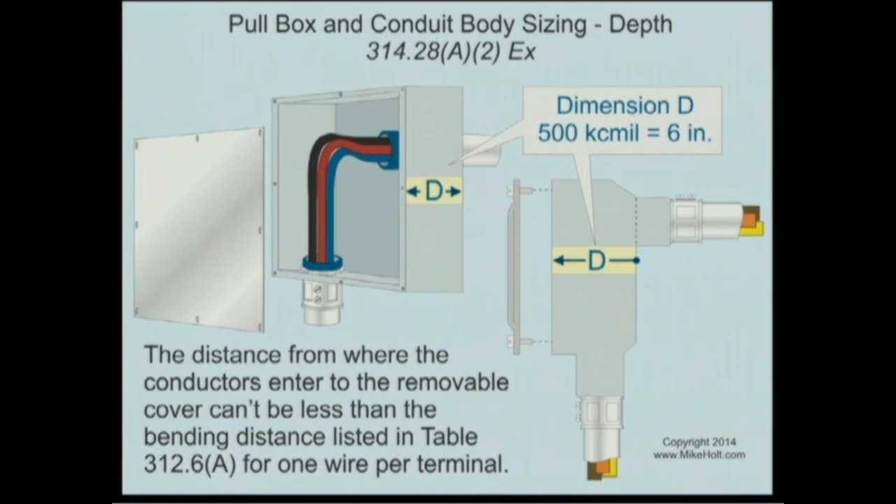And Ryan, give me the exact reference. I think it's 314.28A. There's an exception in there that says conduit bodies don't have to comply with this if they're marked with the size of the conductors on the specific conduit body. Maybe it's not an exception, maybe it's now just a rule. So Ron, 314.28A, what's the rule on that? What's the rule number? A3, yeah, which says listed boxes or listed conduit bodies of dimensions less than those required in 28A1 and A2, which we're talking about, shall be permitted for installations of combinations of conductors that are less than the maximum conduit or tubing fill allowed by Table 1 in Chapter 9.

All right, let me explain what that is saying. That is saying the manufacturers are making these regular LBs. A guy who's a regular electrician, like me and anybody else: hey, I've got a 2-inch, 3-inch, whatever it is, I'm pulling in 500 kcmil, you get the LB, and I remember doing this one time. You get the LB, and no big deal. You go to pull the wire, Victor, and all of a sudden you got the wire in with a little bit of work, and you get the wire going in the other direction, and then it gets to be a little bit of a problem to get those 4 conductors in the LB.

So, Victor, here's what you do, in case you guys don't know this. You go and you get a truck, and you put it in gear, and you connect to only one wire, and you get a 2x4, and you get yourself a sledgehammer, and then one guy holds the 2x4 onto the 500 kcmil. The guy has it in gear because we don't want to give it gas. We just want to have a nice little gear in there, right? Maybe adjust the carburetor a little bit, maybe get the speed up just a little bit.

And then you get the 2x4 holding on that, and then you get the sledgehammer, and then you tap it. And you'll notice it'll go in like a ½ inch, a 1/4 inch at a time. Boom, boom, and then all of a sudden it'll pop. Then you got the one. And then you get the other one. I'm telling you how. And that's when you realize something is not right here, because that was really hard, and I'd never want to do that again. Now, Victor, tell me, is that kind of something that... Oh, yeah, you got it exactly right.

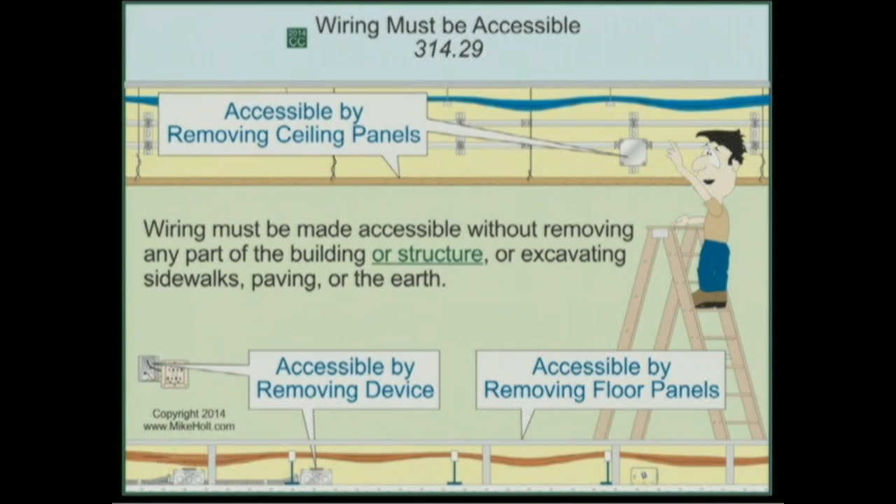314.29, wiring to be accessible. Well, I love these kind of rules. Pretty straightforward, can't be complicated. The wiring must be made accessible without removing any part of the building or structure or excavating sidewalks, paving, or the earth. Now, this has to do with boxes. So the wiring in a box has to be accessible. Of course, you have lift-out panels. That wiring is accessible per Article 100.

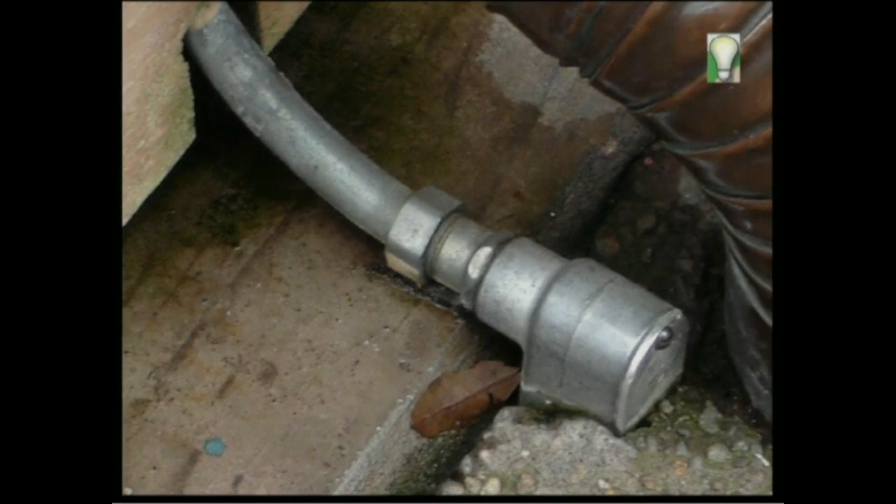Same thing when it's going to be in a raised floor. That wiring is accessible. Clearly, that wiring is not accessible, because the scope of 314 includes what? Conduit bodies.

Handhole enclosures, 314.30. Article 100 defines what a handhole enclosure is. That's something you put your hands in, but you can't physically get inside. Handhole enclosures must be identified for underground use and be designed and installed to withstand all loads likely to be imposed.

Those of you that are watching some of our books and graphics, once in a while you'll see a character in here, and this character is our mascot. This guy is called Wilson, and you can't see this because the cameras are fixed, but Wilson is sitting on top of the camera right next to me that is actually shooting the angle showing the four guys over there. So we have like a little mascot, and every once in a while, you know, Mike Culbert, he took a picture of Wilson, and Scotty, my camera guy here, he's a little strange.

You know what I mean? Whatever reason, he makes Wilson up, and so we kind of follow his lead, and we take pictures, and then Wilson kind of follows us, and that's where it's at. So what I'll do is I'll make sure I'll get Wilson down. Can you get Wilson down, or is that a problem to get him down? Yeah, he's going to get Wilson down. Okay, so I figured there's a good reason that you know the story. Somebody else reading the book and not knowing the story here won't know why Wilson's there. So while we're working on Wilson there, we're going to have Victor. Anybody want to say something, Victor, at all?

Yeah. There's no specific size for a handhole enclosure. Okay, what is the definition of it? It says you can't get in it. Okay. Right. Okay, it says that you cannot get in it. I mean, I've got projects going on right now where a handhole is 4 by 6 by 4. Oh, really? Yeah. Oh, I didn't think about it being that big.

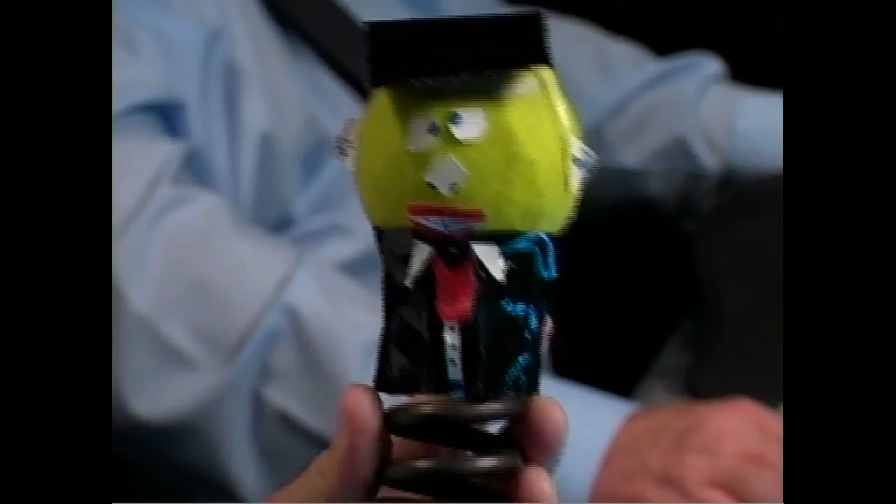All righty. And that is Wilson. All righty? Wilson, you can say hi to these guys. All right. Wilson, you go back to work. Get back up there. He's got his RMS hat on.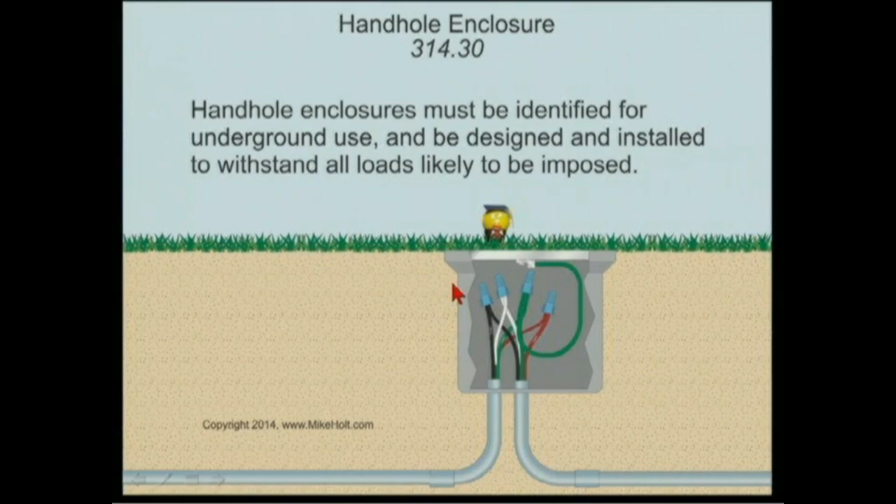All right. So, handhole enclosure is 314.30. That's a handhole enclosure. But you're saying it doesn't have to be the size. It can be a lot larger. Here's the rules. Underground raceways and cables entering a handhole enclosure are not required to be mechanically connected to the handhole enclosure. Ryan, do I have anything in 300.12 where it says metal raceways and cables must be mechanically continuous? Well, that's the general rule. Yeah. Is there anything that says except for switchboards?

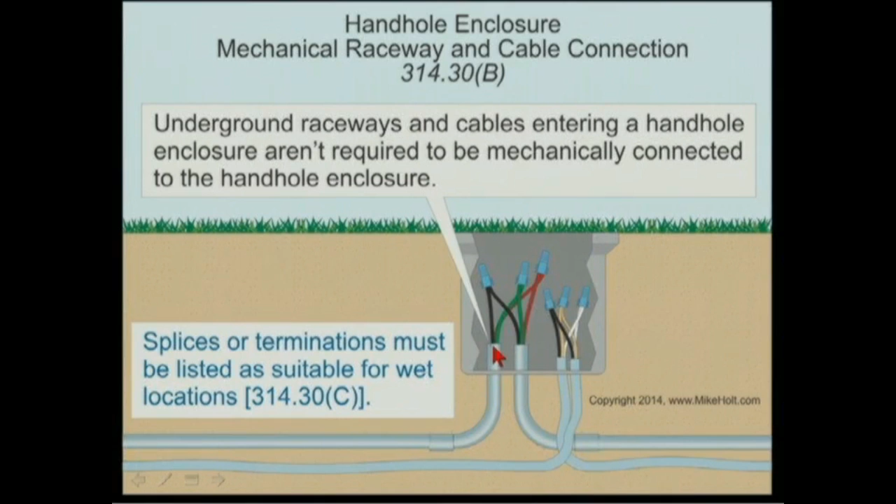Yeah, exactly. Exception to raceways and cables into the bottom of open-bottomed equipment, such as switchboards, MCCs, transformers, things of that nature. This is an open bottom equipment? Yeah, typically. Maybe not. If not, then make it open-bottomed. Okay, you cut the bottom out. Okay, good. But you do need your bell end. Well, again here, if it's 4 gauge and larger, do we need to provide any kind of protection on the PVC, and that's a function of whether or not it's 4 gauge and larger. And then how you provide that protection.

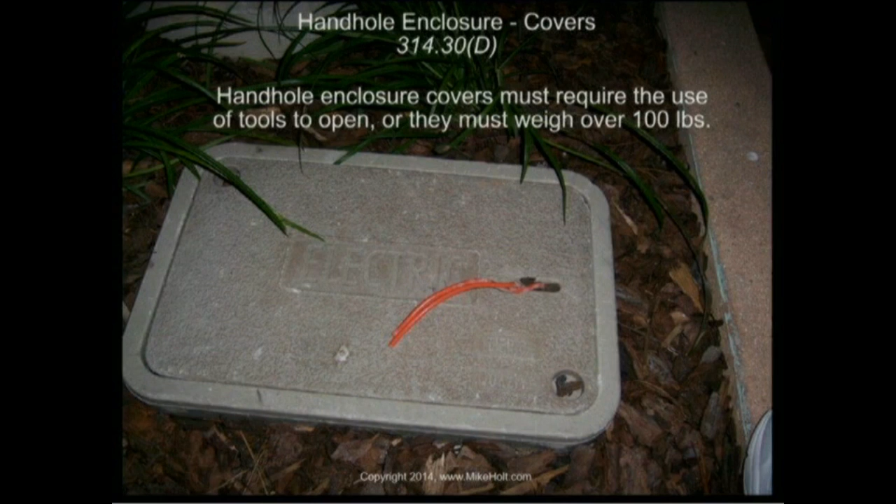Handhole enclosure covers must have identifying mark and logo to identify it as an electric handhole enclosure. Pretty straightforward, you buy them. Handhole enclosure covers must require the use of a tool to open, or they must weigh over 100 pounds. So you need a tool to open it, or it has to be over 100 pounds. Well, one way to solve the problem is that where you need a tool, put a wire around that and leave the wire there. And then it saves you from having to go out and find the tool because it's already there.

Metal covers and exposed conductive surfaces of handhold enclosures containing branch circuits or feeder conductors must be connected to an equipment grounding conductor based on the rating of the overcurrent device. So if you have a metal cover and handhole, we have to connect that cover to an equipment grounding conductor. We talked about this clearly in grounding and bonding course and how important it is because people have gotten killed by metal covers becoming energized on handhold enclosures because it was not at one time required by the code.